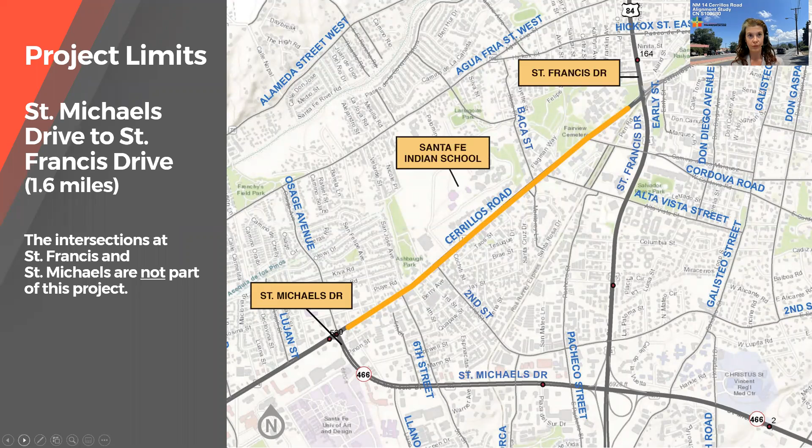Next, I'm going to talk about the project limits and provide some background about the project along Cerrillos Road. The NM14 Cerrillos Road study stretches approximately 1.6 miles from St. Michael's Drive to St. Francis Drive. The focus is the Cerrillos roadway corridor itself, and the project does not include the St. Michael's or St. Francis intersections, just the roadway. This portion between St. Michael's and St. Francis is the final segment of the Cerrillos Road reconstruction effort from Airport Road to St. Francis Drive. NMDOT completed an environmental assessment of the whole corridor in 1998 for these improvements. Construction of the adjacent areas is complete, and we are now advancing with the final phase. The other segments were handed over to the City of Santa Fe, and similarly, NMDOT will hand off this segment of Cerrillos to the City of Santa Fe at the end of construction.

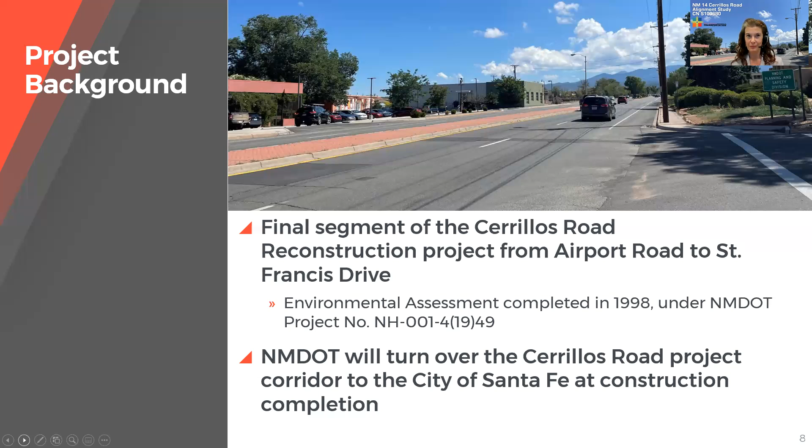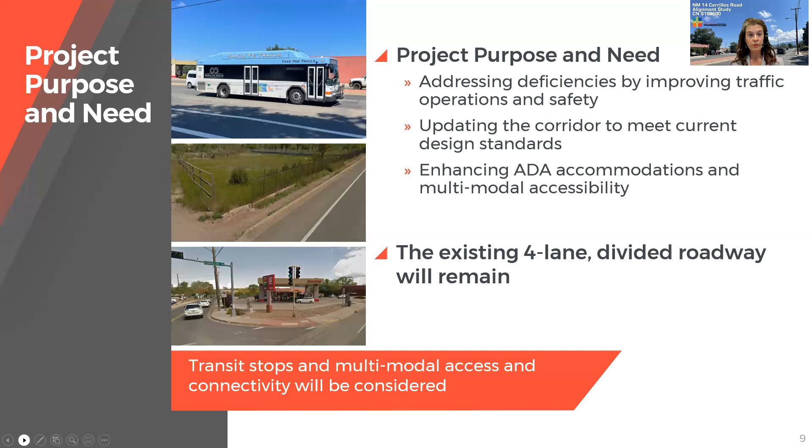Next, I'd like to talk a little bit about the project purpose and need. The purpose of the project is to address the deteriorating conditions along the corridor and look into traffic operations and safety needs. The project is also needed to update the corridor to meet current design standards, enhance Americans with Disabilities Act accommodations, and address multimodal concerns. The existing 4-lane divided highway as it is today will remain. We will also look at transit stops and multimodal access as part of the consideration.

The project is needed to address a number of aging and outdated infrastructure concerns. These include pavement deterioration, sidewalk in poor condition, portions with no sidewalk, and portions of sidewalk that are not ADA compliant. There are sporadic bicycle facilities along the corridor. There are also traffic and safety concerns. The existing drainage has some problems, and there is also some flooding along the roadway, as well as closely spaced driveways and encroachments into the existing right-of-way.

Next, I'd like to introduce Terry Ward, WSP Project Manager, who will summarize our review of existing conditions along this segment of Cerrillos Road and provide some project context. Thanks, Jennifer, and good evening, everyone.

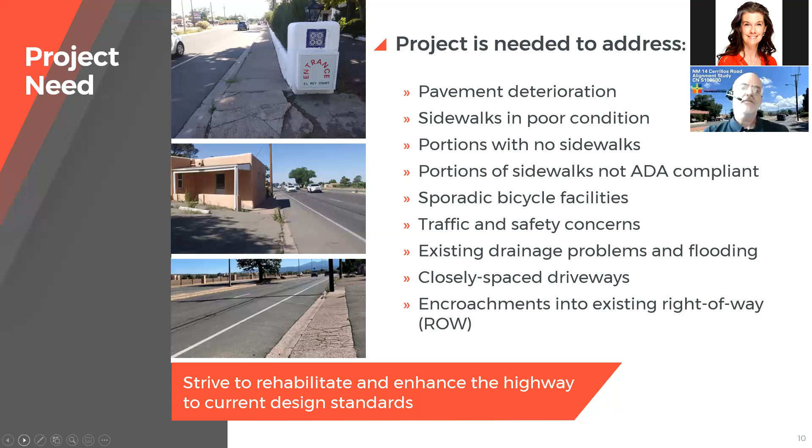I'd like to start by introducing a term called a typical section. So what is a typical section? It's a graphical representation of the roadway and streetscape elements of Cerrillos Road within the existing and/or proposed right-of-way limits. This is important because we're going to feature alternatives of the typical section. You can think of a typical section as if you were standing on the roadway and looking at the elements as they exist on the roadway.

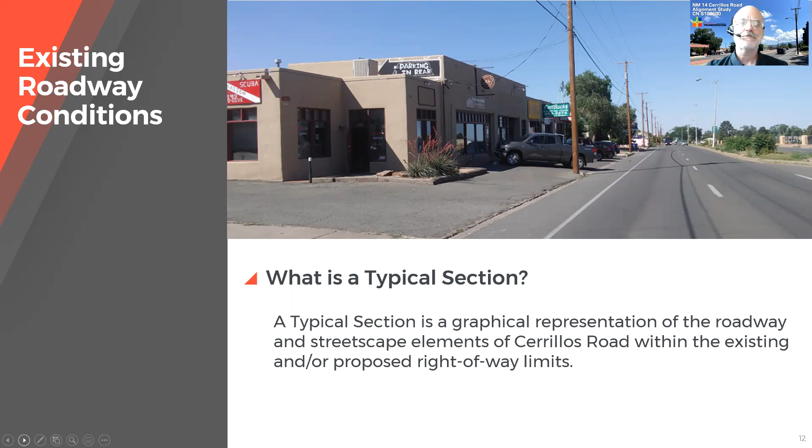So here's the Cerrillos Road existing condition typical section. You'll see the right-of-way limits are 80 feet wide, and that's important because we'll talk about that several times tonight. The median is 12 feet wide existing. There's 4 11-foot driving lanes, variable width shoulder, and variable width sidewalks. In some locations, we'll talk about the limitations of the sidewalk facilities in the existing conditions. The history of the corridor really kind of dates from its time as part of Route 66. Since then, the context of development and business activity along the corridor is what we're dealing with in today's conditions.

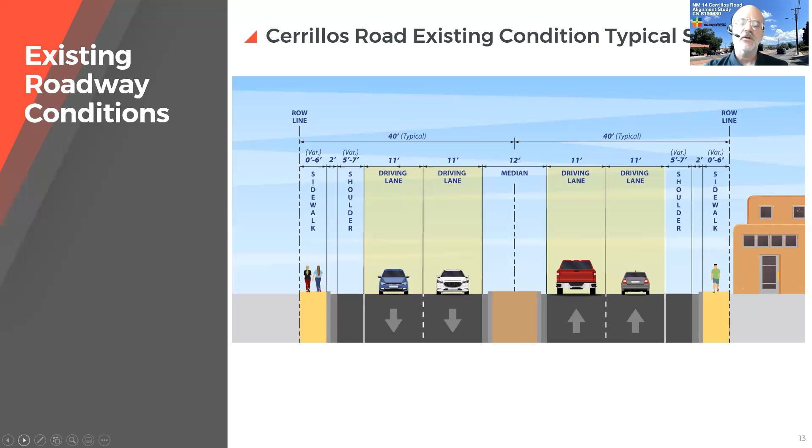So some existing traffic conditions. Cerrillos Road serves high traffic volumes, approaching or exceeding 30,000 vehicles per day. Traffic does fully utilize the available capacity of Cerrillos during peak travel periods. The Baca Monterey intersection, that signalized intersection, is the busiest. Delay is experienced at non-signalized stop-controlled intersections as drivers try to access Cerrillos, and traffic signal system improvements are needed in the corridor.

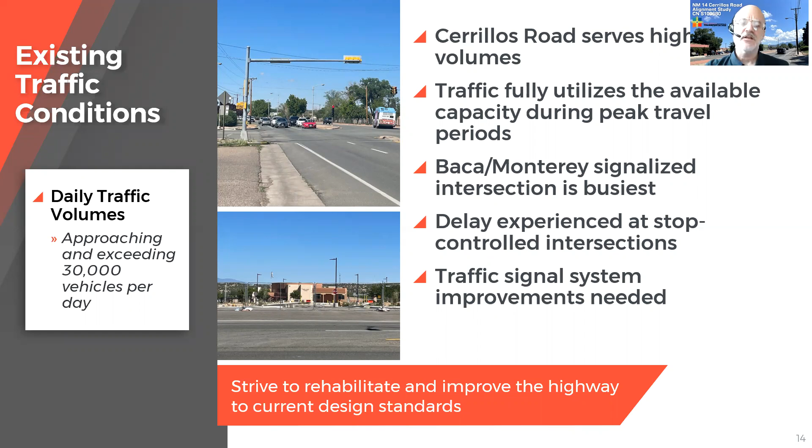Multimodal facilities: existing shoulders of Cerrillos can be used for bicycle travel, but they're not marked and not signed for bicycle usage. Existing sidewalks are in poor condition, and as Jennifer mentioned, not all are ADA compliant. Segments of the sidewalk are missing and not continuous throughout the project corridor. Pedestrian crossings at signalized intersections are inconsistent - some are marked, some are not. Santa Fe Trails bus stops do exist in the corridor.

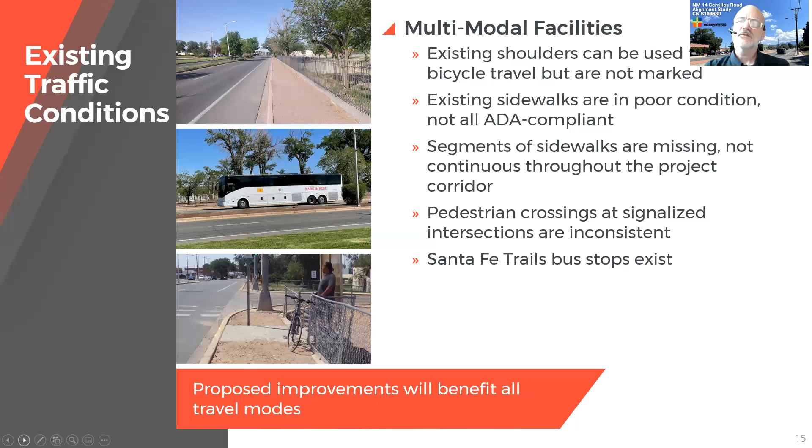So a little bit about safety conditions.

Terry, it seems we lost you for a minute, though I think you're back. Okay, sorry about that. I got dropped, but I'm back now.

2014 to 2018, 494 recorded crashes spread throughout the Cerrillos Road corridor. That's really indicative of a busy street and driver error by following too closely.

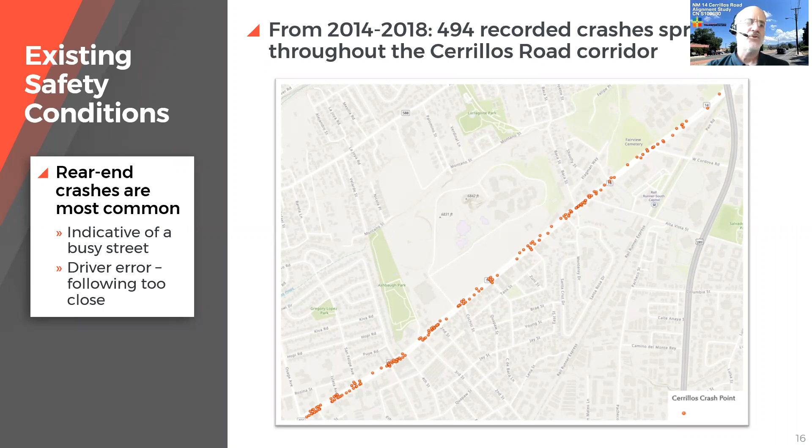Sorry, I got dropped again for some reason. In terms of bicycles and pedestrians, there's actually a low occurrence of bicycle crashes, 8 total in 5 years, and a low occurrence of pedestrian crashes, 6 total in those same 5 years. You can see the graphical representation of the locations on the screen.

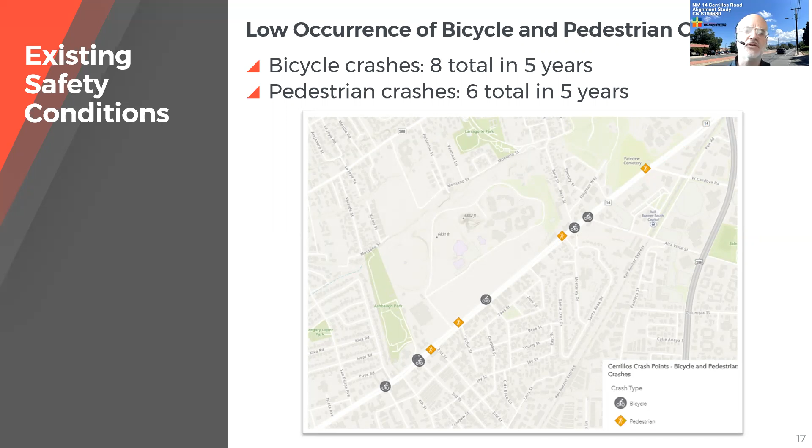In terms of existing drainage conditions, there's minimal existing storm drainage infrastructure. There are 3 outfalls of the drainage on Cerrillos: the New Mexico School for the Deaf, Baca Street, and the 4th Street earthen ditch that flows to Ashbaugh Park. There's flooding of Cerrillos that occurs during rain events, major and minor.

There's no drainage connectivity to adjacent upgraded sections of Cerrillos Road. The adjacent segments of Cerrillos that have been upgraded can accommodate a 10-year storm event, so that's what we'll look to design to connect to. Cerrillos connectivity to the Acequia Madre irrigation system is also an important consideration of the project development.

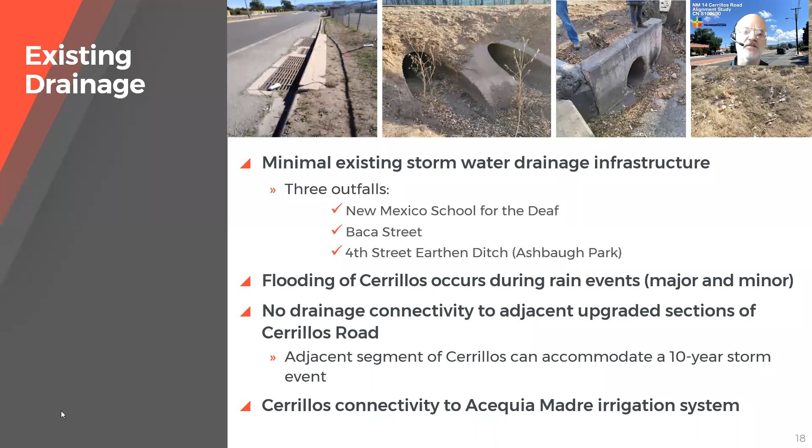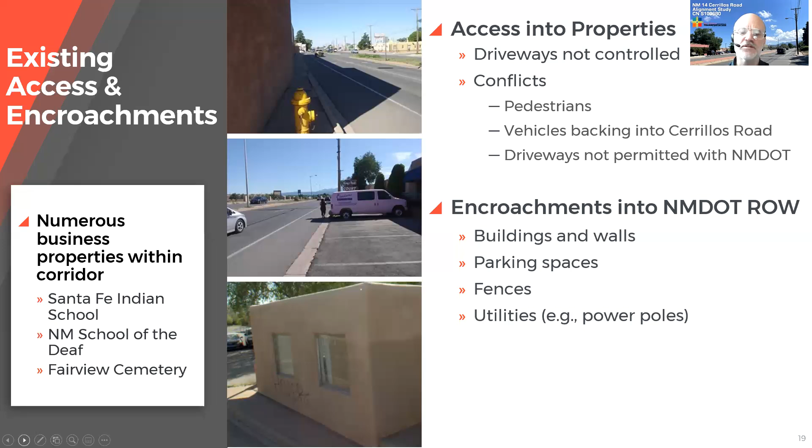Access to properties, driveways are not controlled. There are conflicts with the existing driveways in terms of pedestrian conflicts, vehicles that are parked backing into Cerrillos Road to gain access back onto Cerrillos, and driveways not permitted by the New Mexico Department of Transportation. There's also encroachments into NMDOT right-of-way - buildings and walls, parking spaces, fences, and utilities, for example power poles, to name some of the elements. Those will need to be dealt with in the project development process before we can move forward with the improvements.

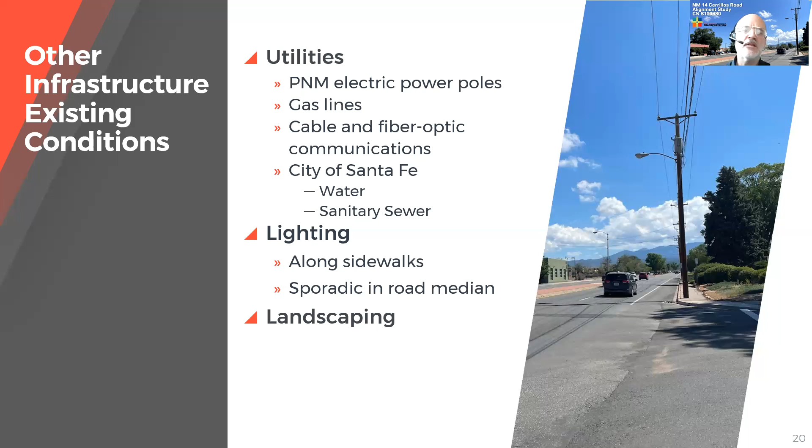In terms of other infrastructure existing conditions, the utilities - PNM has electric power poles. You can see in the picture the presence of some of the power poles. There's gas lines, cable and fiber optic communications. The city of Santa Fe has water and sanitary sewer trunk lines that will look to be improved as part of the project. Lighting - there's lighting along the sidewalks, you can see that in the picture on the PNM power pole, and there's also sporadic lighting in the median, an example of that in the picture towards the center. Landscaping exists predominantly in the median along Cerrillos within DOT right-of-way.

Jennifer, would you like to speak to the environmental existing conditions? Absolutely, thank you Terry. As part of the process, we are identifying the sensitive environmental resources within proximity to the corridor and considering how to design a project that minimizes impacts. Preliminary studies are underway, and thus far we have identified a couple environmental concerns. Within the corridor, we know that we have some noxious weeds and prairie dogs. We have noise receptors and are looking to evaluate whether there will be noise increases. There are visual resources and receptors in the corridor, as well as a number of archaeological and historic resources.

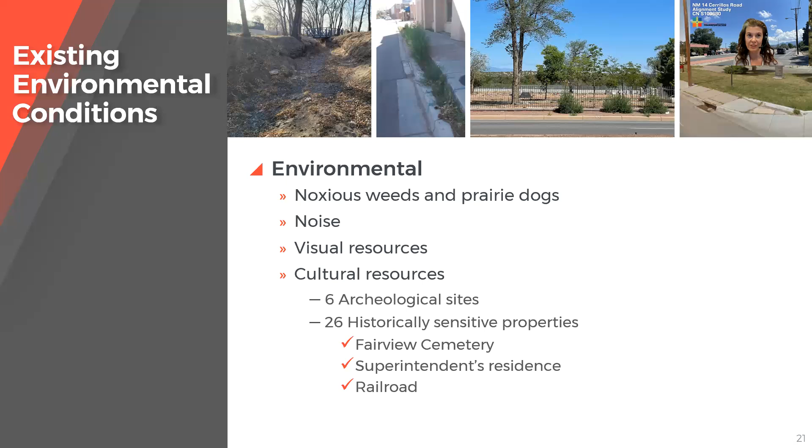Next, I'd like to talk a little bit about the process the NMDOT follows in developing their projects and making decisions. Currently, we are in the early stages of this project - we're in the study phase. For NMDOT, this is called Phase 1AB.

During Phase 1AB, we identify what improvements are needed and why. We review the existing conditions and determine what potential options are available to improve the roadway. As the study progresses, we evaluate the options that may be feasible to carry through to design and eventual construction. We will continue to advance the study after this meeting, and your input is key to helping us come up with one preferred option that we advance into environmental processing and preliminary engineering design.

We will answer your questions live at the end of our presentation, which is going to be in about approximately 20 minutes from now.

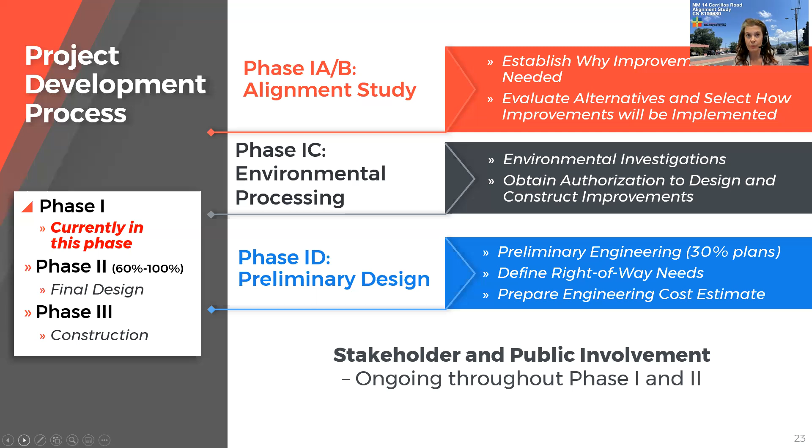As part of the study phase, the NMDOT considers a wide range of factors in their decision-making. Some of these factors include right-of-way needs, environmental resources, traffic safety, construction feasibility, community concerns, engineering limitations, and available funding.

Looking at a range of factors allows the NMDOT to develop a solution that is balanced and meets the project purpose and need. As part of the process, we have been coordinating with agencies and stakeholders that manage resources and lands in and around the corridor. This includes the City of Santa Fe, the Santa Fe Indian School, and the Santa Fe Metropolitan Planning Organization.

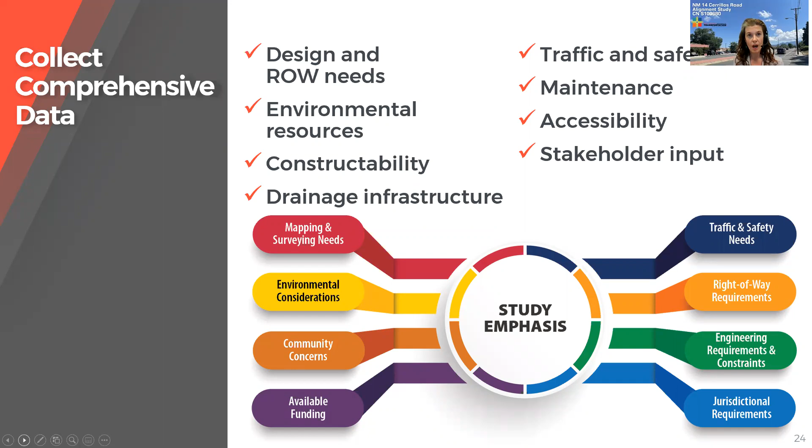And with that, I'd like to turn it back over to Terry to talk a little bit about the preliminary alternatives. Thanks again, Jennifer. And I'd like to start in terms of the preliminary alternatives with City of Santa Fe road design guidelines.

So as we developed alternatives, we wanted to do our homework and research and see what's out there in terms of guidelines. So the City of Santa Fe new roadway minimum guidelines include an 18-foot raised median, 11-foot driving lanes, 5-foot bike lane, 6-foot sidewalk, and a 5-foot sidewalk buffer between back of curbing and sidewalk. All told, that adds up to 98 feet of right-of-way from one side to the other.

And if you recall, we have 80 feet existing within Cerrillos to work with. So we're definitely not able to meet all the City of Santa Fe design guidelines for new roadways. I'd like you to remember, if you could, the 11-foot driving lanes, the 5-foot bike lane, and the 6-foot sidewalk as we move forward, because we'll come back and reference those in our alternatives.

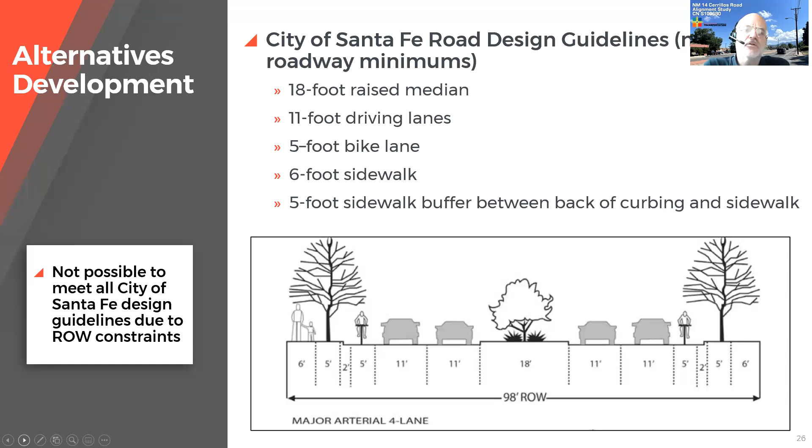So some key considerations. There's limited right-of-way available along Cerrillos, existing 80-foot wide width of the corridor in terms of DOT right-of-way. Abutting businesses and other properties do join up or adjoin that right-of-way.

There's not enough space to widen to 6 lanes, similar to adjacent improvements south of St. Michael's Drive. And there's limited right-of-way available to improve the cross streets that intersect with Cerrillos Road.

For example, Baca Street may be able to experience some traffic operational improvements if the side street approaches were improved at Baca, Monterey, and Cerrillos. But there's developments in all of those quadrants which would not allow us to do that.

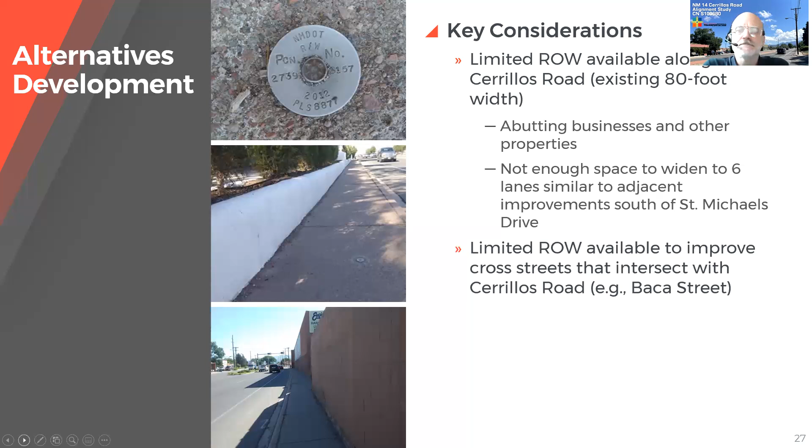Some other key considerations with utilities: there's utility conflicts with the sidewalks. There's approximately 55 PNM power poles within or near the right-of-way limits. Pole locations are inconsistent throughout the corridor.

We've looked into the cost to bury the power lines with PNM, and it's prohibitive from an operational perspective because there's a very high initial capital cost. There's also a fairly significant cost to property owners for service connections if their facilities were buried, to reconnect the PNM facilities with the businesses.

So what we've tried to do so far is to shift the alignment of Cerrillos and reduce widths of certain features like sidewalks where there's poles to accommodate the poles as best we can. And again, there are several buildings at the right-of-way limits. In fact, there's several buildings that encroach into the right-of-way that are out there today.

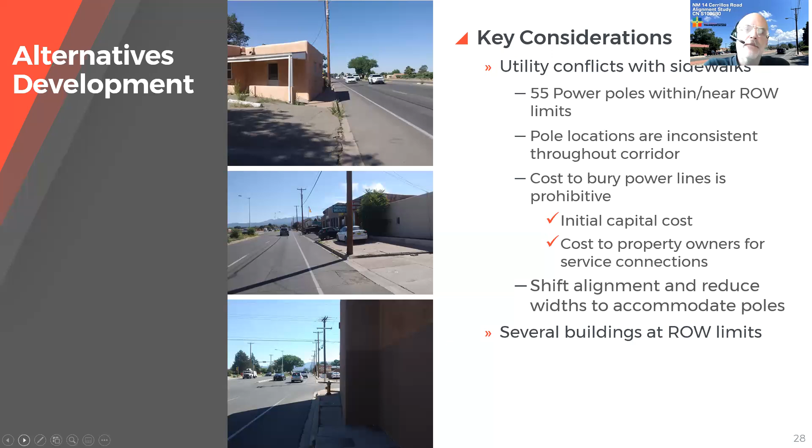So how should the roadway be improved? Well, there's the do-nothing alternative, which we'll look at and study, but that does not satisfy the purpose and need for this project. So we'll look at maintaining the existing alignment or footprint, if you will, of Cerrillos with some minor shifts in alignment to help deal with some of the constraints.

Our efforts really have started with determining the desired roadway typical section for corridor consistency. Site-specific improvements will follow at a future public meeting. For example, signalized intersections, pedestrian bike crossings—all of those site-specific improvements will follow at a future public meeting. Tonight, we're going to focus on typical sections of the roadway throughout the corridor.

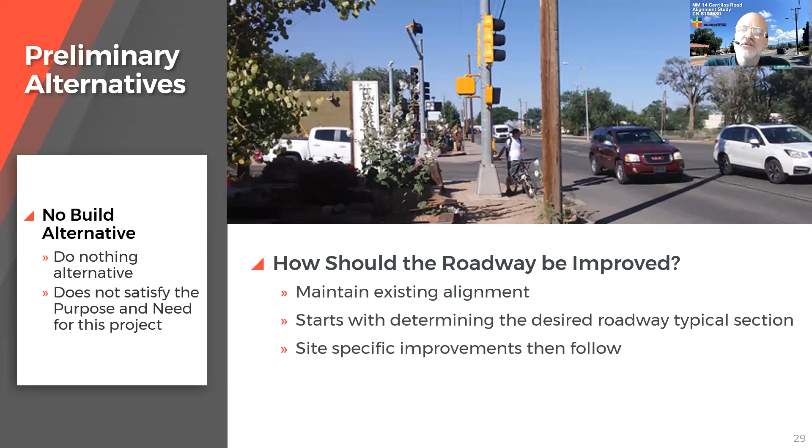So some improvements in terms of guidelines, we're looking at complete roadway reconstruction. We're also looking at reconstruction of underground utilities—water, sanitary sewer, the City of Santa Fe facilities I talked about—and the storm drain system, in terms of adding a storm drain system throughout the corridor.

Improvement alternatives considered the key corridor constraints. So we looked at differing widths of driving lanes, median, shoulder, and bike lanes. And we've looked at various pedestrian facilities, including sidewalks, shared use paths, and multi-use trails that would also accommodate bikers or bicyclists. Our initial development that we're going to share with you tonight in screening evaluation consisted of 10 typical sections that we developed for consideration by reaching out to key stakeholders and our partners on the project.

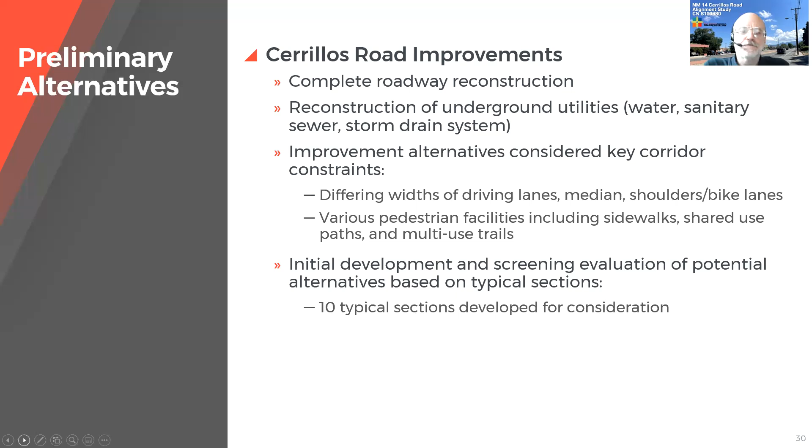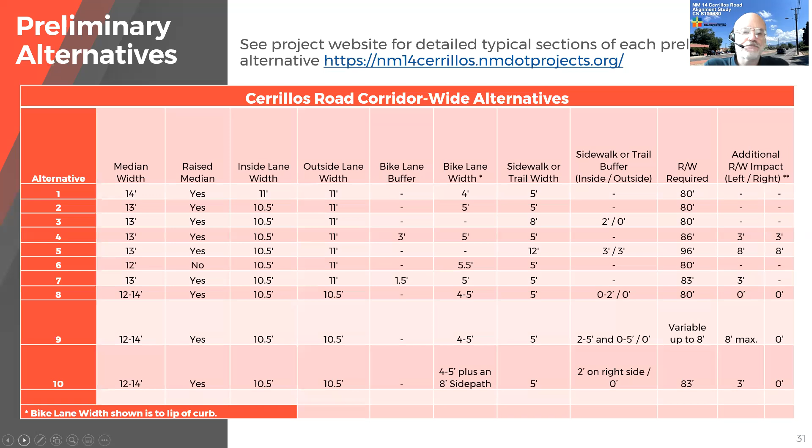So, some traffic and safety improvements. Again, these additional details will emerge in future public meetings, but we'll look to upgrade the existing signal systems. A signal at the new Santa Fe Indian School entrance is under consideration. We'll also look to deploy or install fiber optic communication lines, including connectivity of the new signal systems.

I mentioned we'll evaluate those stop-controlled intersections. Our ability to improve those in terms of traffic capacity or operational perspective will be limited, as I mentioned. We'll also look to perform a traffic signal warrant and access management study at the Railfan intersection.

We'll consider pedestrian movements and upgrades to pedestrian accommodations at the pedestrian and bicycle crossings and signalized intersections I talked about. We'd really appreciate stakeholder and public input on pedestrian and bike crossings of Cerrillos in terms of locations of importance and concerns. We'll also look to enhance bus stops - there's a new relocated bus stop at 2nd Street near the Santa Fe Indian School that we'll look at installing, and we'll also look at potentially putting in bus shelters at bus stop locations throughout the corridor.

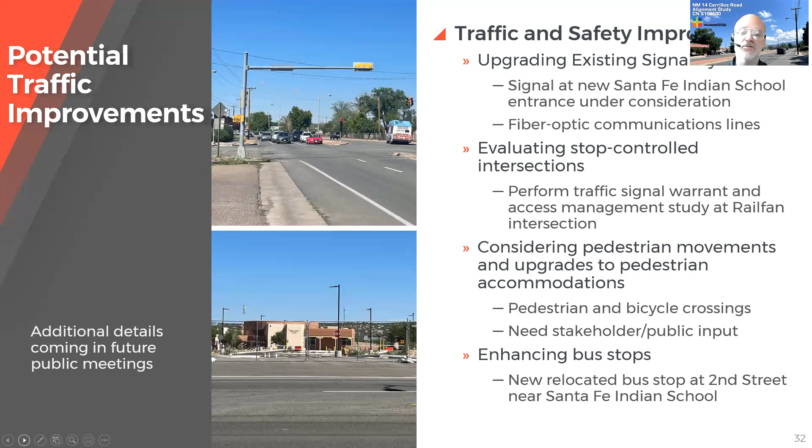In terms of drainage improvements, I mentioned we'll look to install a new storm drain system throughout the corridor to connect to the previous Cerrillos Road improvements to the south, at St. Michael's. We'll look to use the existing outfalls - I mentioned the 3 of them. We will not increase the flows and will strive to actually decrease the flows to the outfalls.

We're working with the Acequia Madre Irrigation Ditch Association because of concerns they have with their facilities. The New Mexico DOT is drafting a general office campus master plan to improve drainage conditions on Cerrillos Road. In fact, one-third of the drainage onto Cerrillos Road comes from that area, and that effort was identified as part of this study already by our initial drainage effort. The draft general office campus master plan concept is due soon, and portions of that effort may be incorporated into the project as our project development moves forward.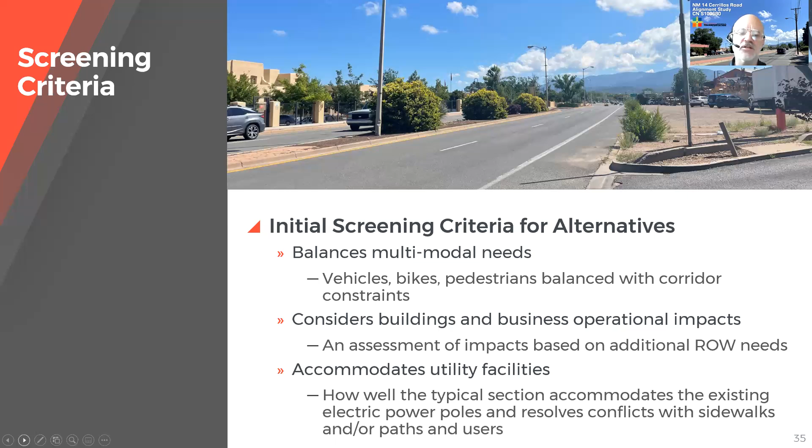And fourth and finally, how well the alternative provides a smooth riding experience for bicyclists. What I mean by that is if there's a sidewalk or trail facility behind the curbing, with all the driveways that are there, there could be an undulating or up-and-down profile of the sidewalk or multi-use path directly behind the curbing.

So here's a matrix of our 10 alternatives that we put together for your consideration and review. A couple things I'd like to point out: number 1, for the first column, balanced multimodal needs, there are no issues without concerns - that's one of the biggest challenges, balancing all the multimodal needs throughout the corridor. So we have 3 alternatives that are not viable, that have significant flaws. The remainder are all viable, but there are concerns no matter which alternative we pick.

Secondly, as you go down the list of alternatives, the first 7 all have issues or significant flaws which would eliminate them, and most of them have at least 2 of those significant flaws. Then the last one, number 10, also has a significant flaw. So you'll see, looking at 8 and 9, those were the only 2 without any red or non-viable ratings for all 4 categories.

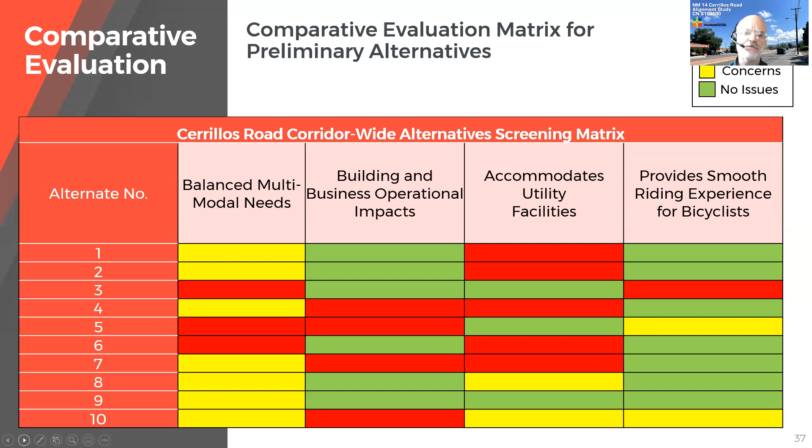So those preliminary alternatives not recommended for further consideration: Options 1, 2, 4, 6, and 7 could not provide adequate space to accommodate the power poles and minimize or mitigate sidewalk impacts. Option 3 could not provide adequate space for roadway shoulders, and had impacts to multimodal accessibility, and would not provide a smooth riding surface for bicyclists.

Option 5 could not provide adequate space for roadway shoulders and had impacts to multimodal accessibility as well. There were also additional right-of-way impacts that would affect businesses. Option 10 had additional right-of-way impacting businesses as well.

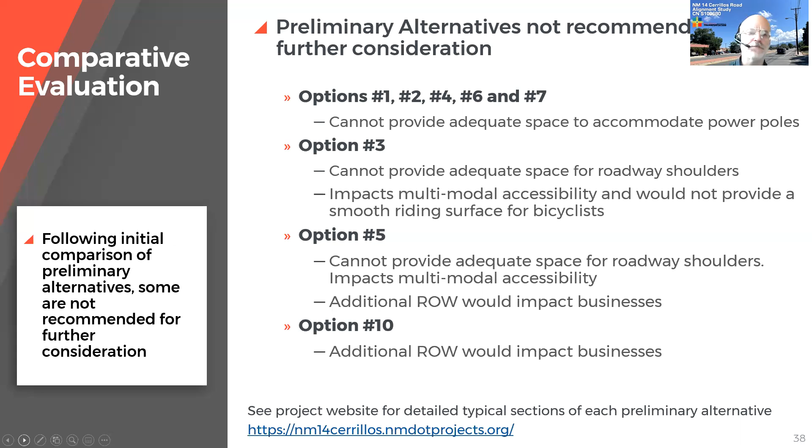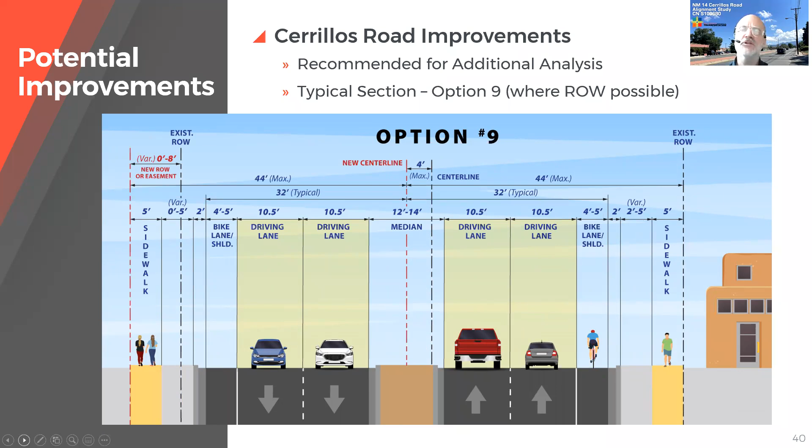Option 9 is very similar to option 8, but it's recommended for additional analysis in areas where right-of-way is possible or we can obtain additional property for our improvements. The main difference is there's additional width in the buffer areas between the bike lane or shoulder and the sidewalks on both sides. On the left side of the typical section, you'll see a variable 0 to 8 foot additional right of way or easement that allows us to expand this typical section width, providing some additional width in the buffer areas.

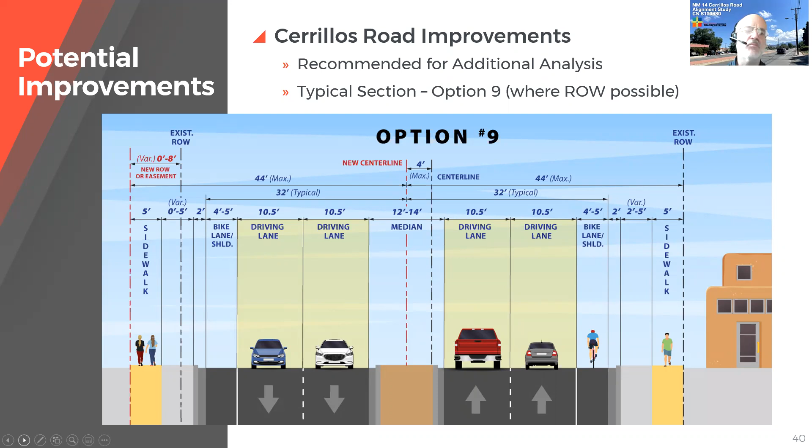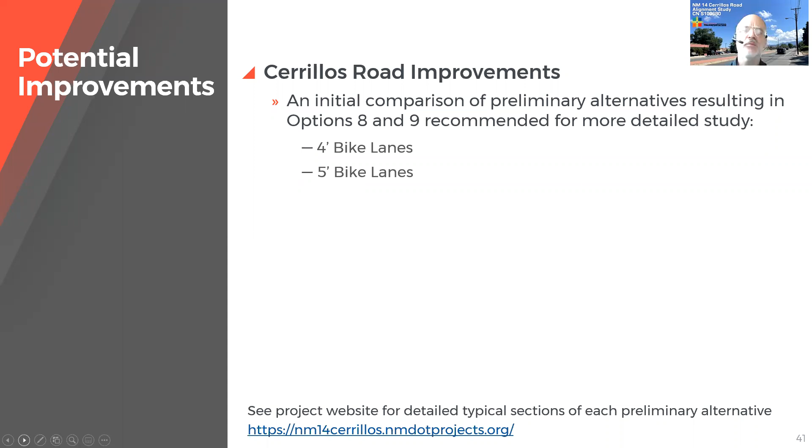So an initial comparison of the alternatives resulted in option 8 and 9 recommended for further detailed study. At this point in our study, we've actually worked ahead a little bit—we've developed 2 layouts throughout the whole corridor using options 8 and 9. We have a 4 foot bike lane option and a 5 foot bike lane option. I'd like to show you the 5 foot bike lane option just so you can see what we're talking about, because they're both also on the project website if you'd like to go look at them.

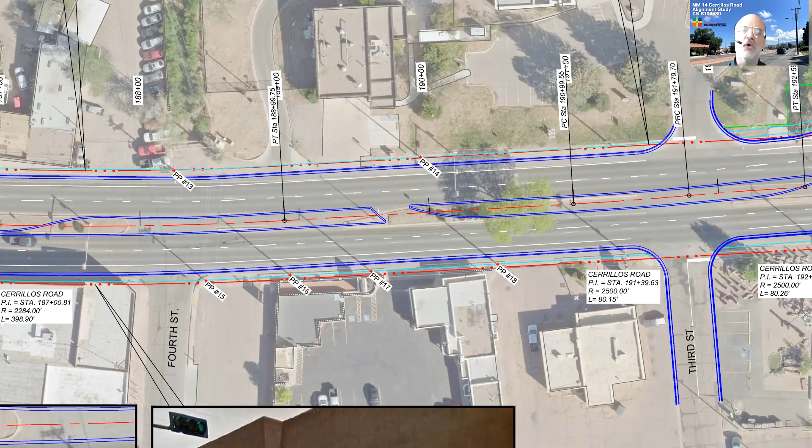So this is our typical section, option 8 with 5 foot bike lanes. It's what we call a roll plot of the entire corridor, or a layout. At this location, in blue is the median and outline of the roadway, the darker blue. In red, with the 3 dots on both sides, is the right-of-way limits, or the DOT right-of-way, that 80-foot width I've been talking about. Close to that, in lighter blue or turquoise, is the width or extents of our typical section. The PP with the number is the power pole location—we've noted where exactly all the power poles are, those 55 poles I talked about. I'd like to highlight a couple things here.

If you look to the lower left by 4th Street and Cerrillos, the building there on the lower left quadrant—the red line with 3 dots in it goes right through the building. That means the right of way actually goes through a portion of the building, or saying it another way, the building is encroaching onto existing right of way. The turquoise line is just at the face of the building. So we've actually shifted the alignment of Cerrillos slightly so that our improvements with a 5 foot bike lane will fit just in front of that building, allowing the improvements to be made without having to remove a portion of that building, or potentially allowing that building to remain in place.

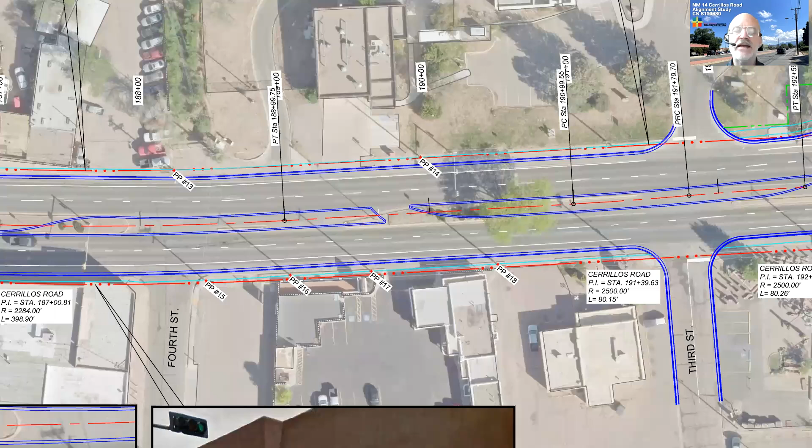We've done that at several locations throughout the corridor. Next, I'd like to turn it back to Jennifer. Thank you, Terry. That's great information.

As a reminder, before I go into the next slide, that information is available on the NMDOT website, which is nm14cerrillos.nmdotprojects.org. Now I'd like to take a little bit of time to talk about the schedule and the next steps.

The study began in summer 2020 and is anticipated to be completed by February 2022. We are presenting this evening for our first public meeting, and last week we had a business owner meeting. As the study advances, we will have another public meeting in the future, and we encourage you to attend.

At the end of the study, we will begin preliminary engineering and environmental study, which is expected spring 2022. We will have another public meeting to help us refine the alternative, and we expect to finalize design by the end of 2022, start of 2023, with construction of the first phase starting as soon as late summer, fall 2023.

We anticipate construction will be phased, at least 2 phases, possibly 3. The timing and the phasing of construction will depend upon available funding.

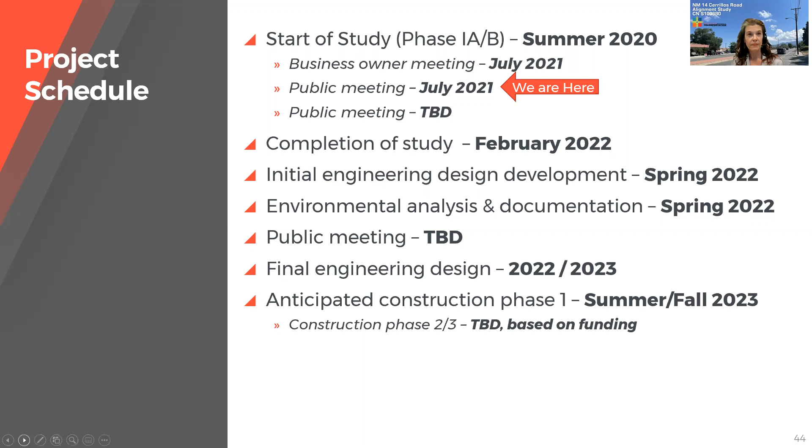Next, I'd like to talk a little bit about what those steps will look like. We will be gathering public input from the public today and after our event. For the next 30 days, we will be completing the detailed Phase IA/B study analysis and preparing the report.

We'll be completing the environmental studies and the documentation, as well as developing preliminary design plans and allowing for development of a final design plan. After that, we will identify any right-of-way acquisition needs and prepare the project for construction letting.

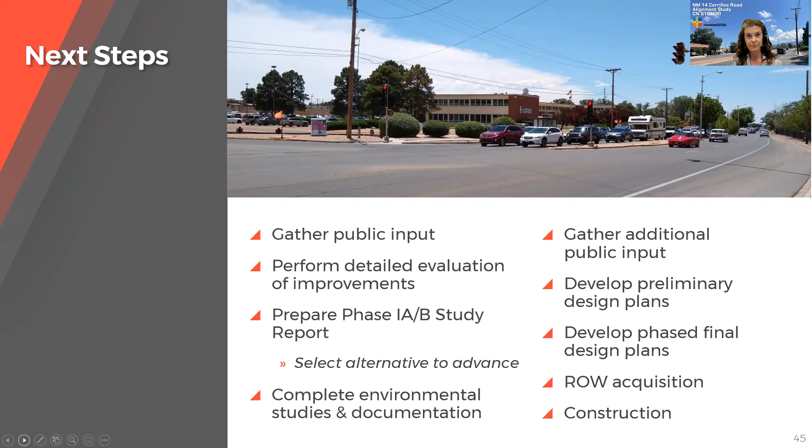Well, now that you've heard from us, we would like to hear from you. We're going to be getting ready to go into our question and answer session. But before we do that, I'd like to just give you information on how you can get in contact with us.

You are able to send an email. If you have any questions or comments, please send me an email at jennifer.hyre@wsp.com. You may also call me with any questions or concerns you may have.

That number is area code 505-878-6577. You can also send any of your comments and questions through the postal mail service. There is also a comment form available on the NMDOT project page, which is nm14cerrillos.nmdotprojects.org. There's also a MetroQuest survey that you can complete as well.

I'll talk about that survey in just a second. We're hoping that you provide us with your questions and comments. At this time, we prefer electronic means as we all are still teleworking. Also, we ask that you provide us with those comments and questions by August 20th in order to allow us to advance with the study.

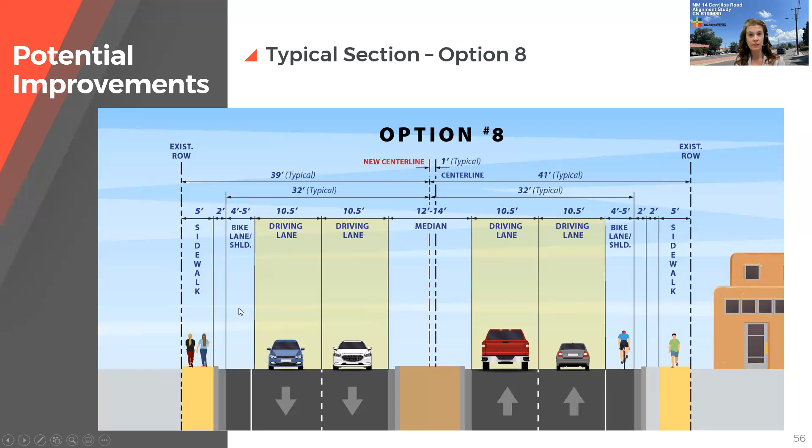Make sure we get your name and your contact information so that we can get back to you with a more definitive answer. Yes, please, if you would reach out to me so that we can definitely help answer that question for you. This is great feedback and we definitely want to explain the thought process, explain what we've done.